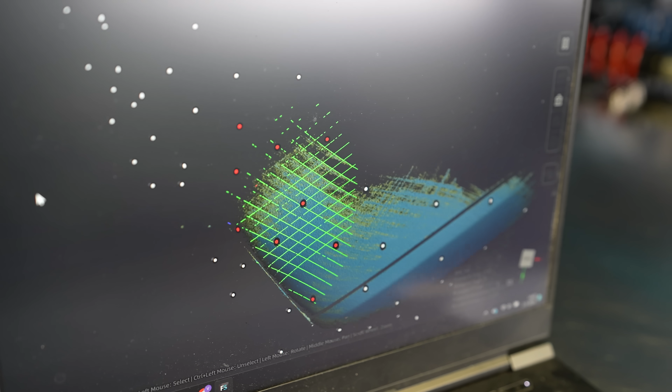And our subject for today's video is the BMW E30 that has been skillfully crashed by me and skillfully rebuilt by someone else. But of course I paid for all the damages because that's how we do things around here at the Nürburgring. So the purpose of today's video is, again, we have here the Shining 3D FreeScan Combo HX scanner that we've picked up previously, that you have seen the video of. And what we want to see actually is how is the level of restoration. If there are any panel gaps, if there's anything else we want to see. Lapo, can you tell us more from a technical side before I start talking nonsense?

First step is to put the scanning dots on. So we're going to create a map of the fascia of the car, and we're going to see if all of these panels are going to match on the other side. We're going to scan this part, we're going to scan that part, and then we're going to switch them and see if they overlap correctly. Nice, very cool. All right, fast forward to the dots application.

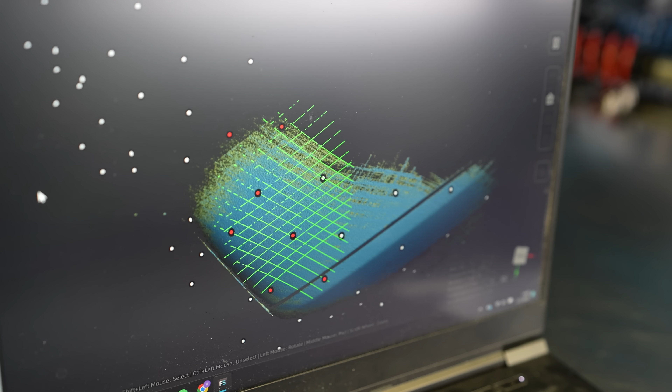Now you're actually gonna start scanning the surface, the car. Scan mesh instead of markers. Hey, I know something! And then we have 26 lines, which should be the faster one. So, all right. Beautiful. So cool. You want a laptop closer to you?

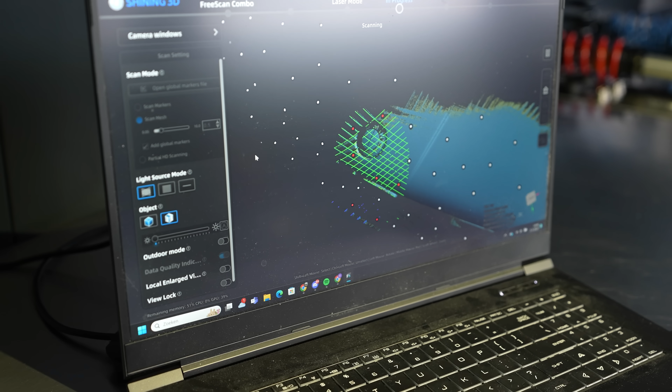So now we have it. Yeah, we have the front fascia of the car. Nice. And you can see how detailed. Like this, you can zoom in a lot. And we even used only, I think, medium resolution, or? Yeah, that's the lowest resolution there is. Oh, this is the lowest, 26 line. And we can go even smaller, so this is 0.5 millimeter, and then we can go all the way to 0.02. I think this is already quite enough.

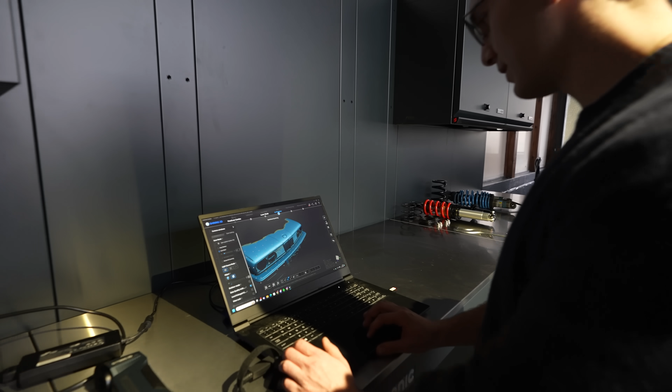Now we can cut it in the middle and mirror and see what happens. Oh, really? Like that? Yeah. Well, that's even smarter than I thought. I thought we were just gonna measure literally every panel gap manually and see what happens. We can also do that, but... Yeah, we can do both.

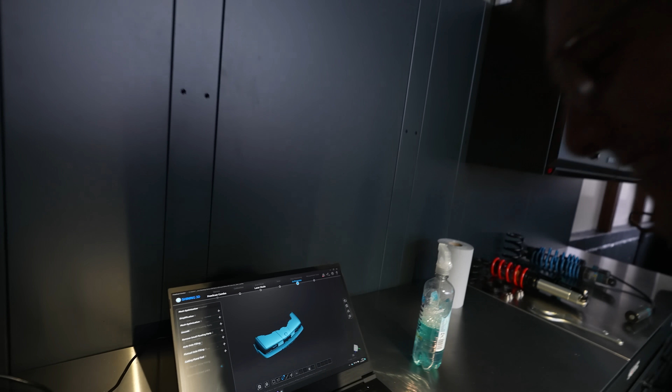Mesh done. Okay. So we have maybe a bit too many triangles. We have 2 million, so let's see if the new PC can handle 2 million triangles. Well, it's my old laptop, so let's see if it can handle it. I'm sure your PC can handle it. So you're gonna export the mesh now to your PC or what? Yeah. So we're gonna save it, put it on the drive and open it on my PC. Sounds good.

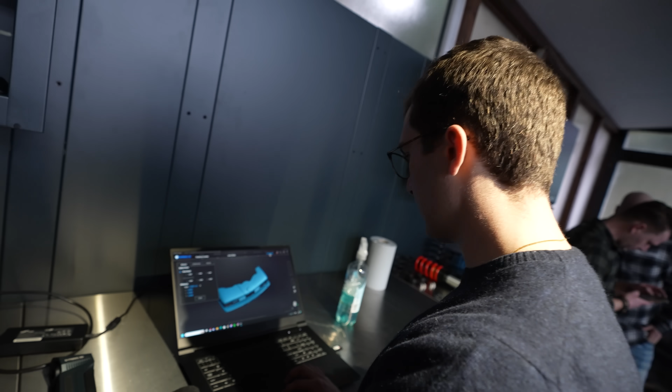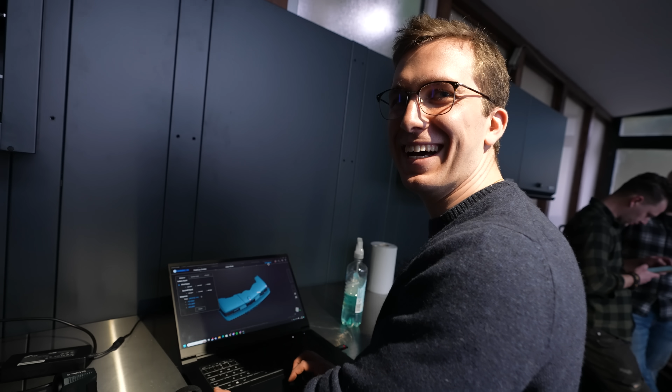So we can already measure the stuff in the Shining 3D software, actually. So 644, and then if I do second point, 640. So it also depends on if I click in the right spot. If you clicked in the accurate spot. I think we should do it on the software. All right, let's do that. But you can measure stuff if you have a mouse. If you're in a hurry, yeah. All right, let's have a look.

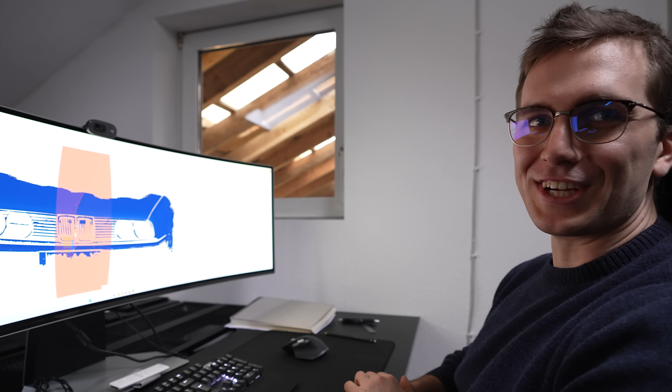Quick teleportation to the main office and the main rig, where we now imported the scan into Autodesk. So what are we doing next? So we're gonna split the mesh in two and mirror one part on the other side, and so we see how close it is to matching. Okay, so symmetry is the most beautiful thing according to the human brain.

Okay, now I'm gonna change the color. Give a second because it's loading. It's 2 million faces of a mesh, so polygons, so it's a bit heavy. Actually, it's pretty spot on. Yeah, it looks pretty good. You think so? Yeah. So I'm gonna take this one off.

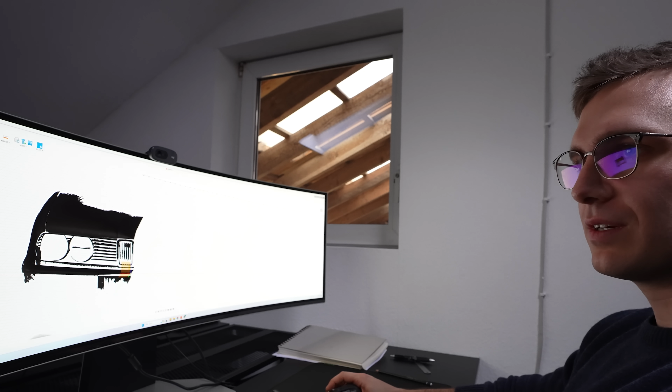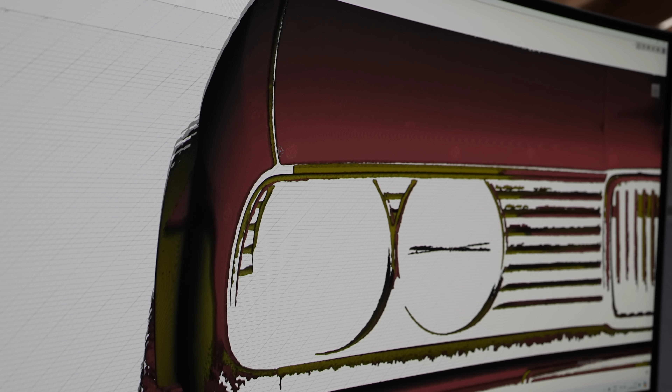I'm gonna create aspect, display mode. So now we should see that the car is slightly off, but here it's pretty much... So the yellow is one side, and the pink is the other side mirrored in the middle plane, see here? So you can see that it's slightly off, but it's not horrible for a 30-year-old car. So yeah, 36, 36-year-old car that has been crashed and repainted.

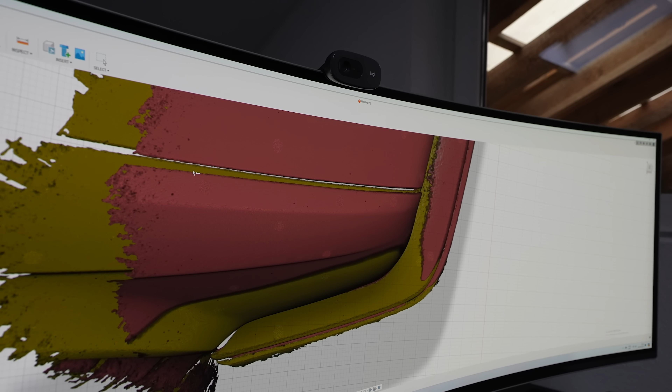So you see, where was the crash? On that right side, there, yes. Exactly there. So I can see that this part is pushed a bit in because the other part is the, let's say, good part, right? Yeah, so being this part out, it means this part is slightly in still. But I mean, I can tell you by how much. Yeah, the fenders are original fenders, but from another year of car, because the fenders that were on the car were trash, no fixing. I mean, it's not a bad job.

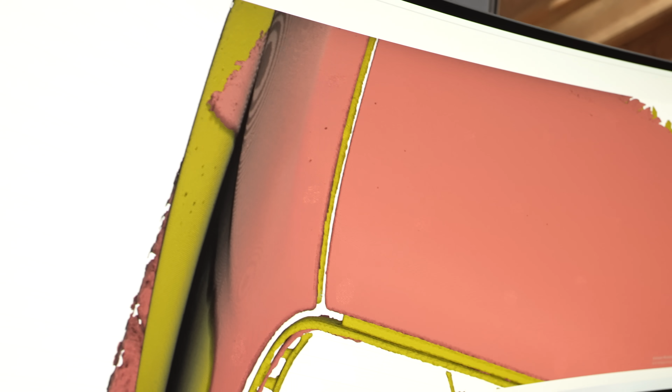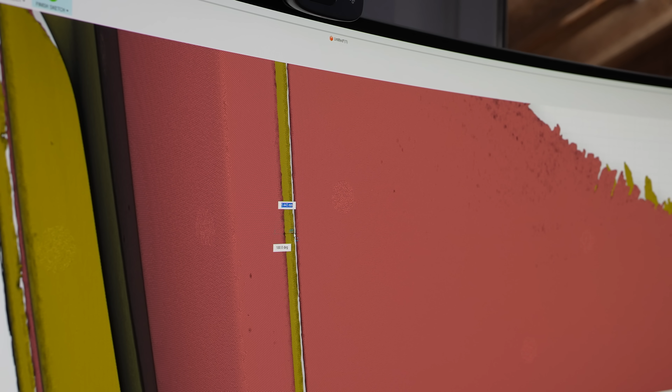Here it's pretty much bang on, as you can see. It's nice. It's good. Better than I thought. So can you do the exact measurements, like what the difference is? I can do a projected measurement, so we can see exactly what's the deviation. And I flared the arches to fit the tires. So this is also another 5 millimeter, more or less. It's a projected measurement, so it could be a little bit more, a little bit less, but it's not horrible.

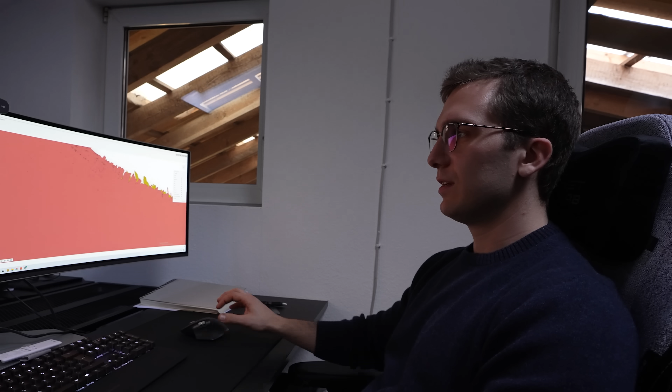No, it's 5 mil. If it's on your hypercar, I would be pissed, but this is a 36-year-old BMW track car that's been driven hard and will be driven hard. That's very good.

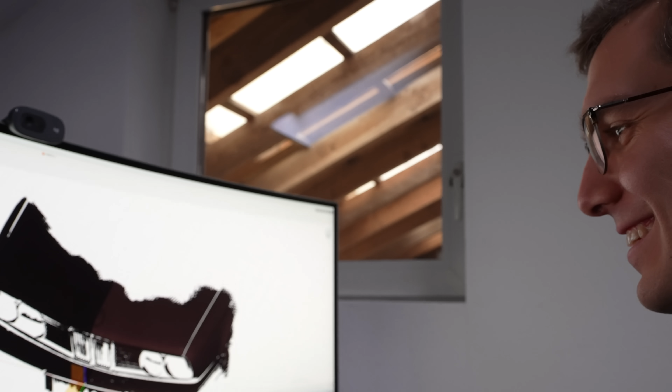That's actually really good. Still better than Tesla. It's true. Oh man, we're gonna get so much hate comments.

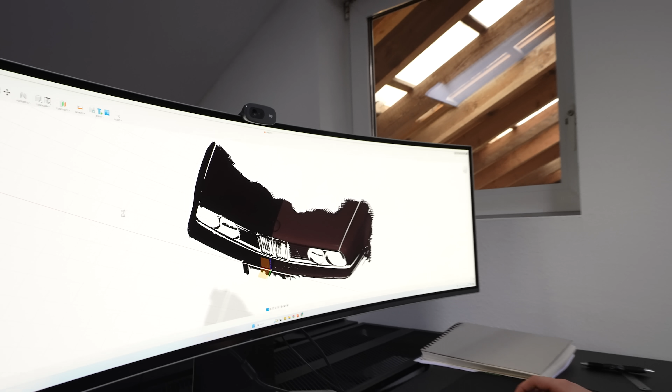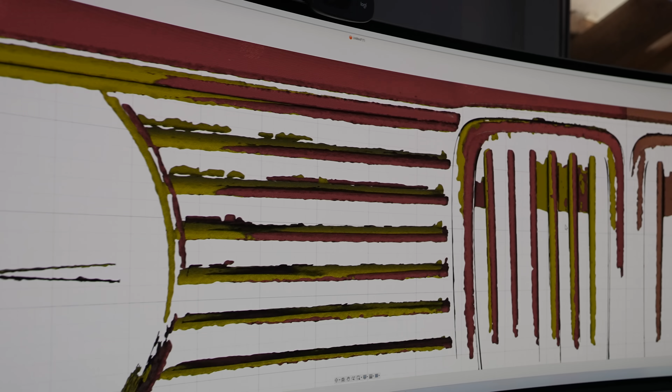Nice. Do you want to check any other panels? I think that's the most important one, the biggest one. The grill meshed pretty good. Yeah, this one side is original part and the other side is remanufactured part, so that's probably where it's a bit off. But it's not noticeable by eye, I think. From the front, it's bang on. So as you see, also the grill here, there's 5 mil off. Basically spot on for this era of car. Very nice, you should be happy.

I am. Perfect. And after that quality control, it's now time to take off the markers. It's just gonna be a pain. Is it really that difficult? They stuck very well. Well, that's actually not that bad. It requires a bit of finesse. So on the Speedster it would be a blast because you just scratch it. You have fresh paint.

Well, actually, I heard that Shining 3D is releasing a new scanner soon that will not require any markers at all. You can already now scan with infrared, but the upcoming one, I don't know the technical terms, I know that it can properly scan without the markers. So maybe we can have a play with that in an upcoming video. And other than that, that's kind of it. We just wanted to show you how it works and what we can do, and I hope you guys enjoyed it.